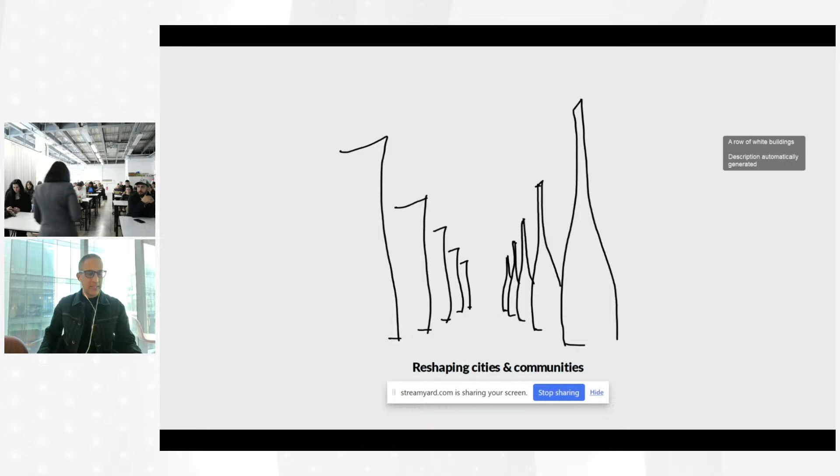Thank you, Suat, for the invite, and thanks everyone for joining today. I'll try to keep - I don't like to call it a presentation, I like to call it a chit chat. So I'll just take you through a bit of my architectural journey, the projects we are working on, and engage you through the progress or career of somebody who studied architecture and had a dream to achieve something in architecture. Whether this dream has been fulfilled or not is something different. But I will take you quickly through my journey, my education, my career, and then the projects we've been working on. Feel free to ask questions, to stop if you have anything to raise or comment on. So let's make it a flexible chit chat more than a presentation itself.

Each journey, each architectural career starts with a journey. And this is something I always say: it's important for architectural students to set up an objective when they enter this field. When they decide to start architecture, it's one of the very few professions that you cannot just do because you just want to be an architect. It's something you have to do because you have to study something. It's one of these professions where you really need to have a deep understanding and passion towards, because it's quite a demanding profession. It's very fulfilling mentally, spiritually, but also very demanding.

Since I was a kid, I knew that architecture was going to be my path. Maybe because I grew up in an architectural house - my father was an architect, he is an architect still. So growing up as a kid, I saw physical models, drawings. At that time, there were T-squares and drawing tables. I grew up within this kind of environment. So shaping architecture as my career was a bit of a clear idea for me.

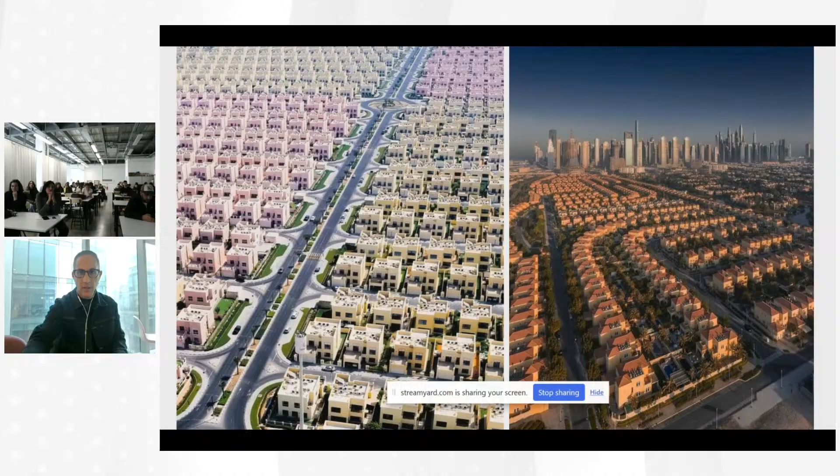Our first project that we had to build in Dubai was a townhouses project. The client came to us with a brief: they wanted to build 28 townhouses in Dubai. Repeated copy-paste, commercials are very important, budget was tight. So our challenge was how to design a residential project that hits all the client's objectives in terms of budget and cost, but at the same time stands out.

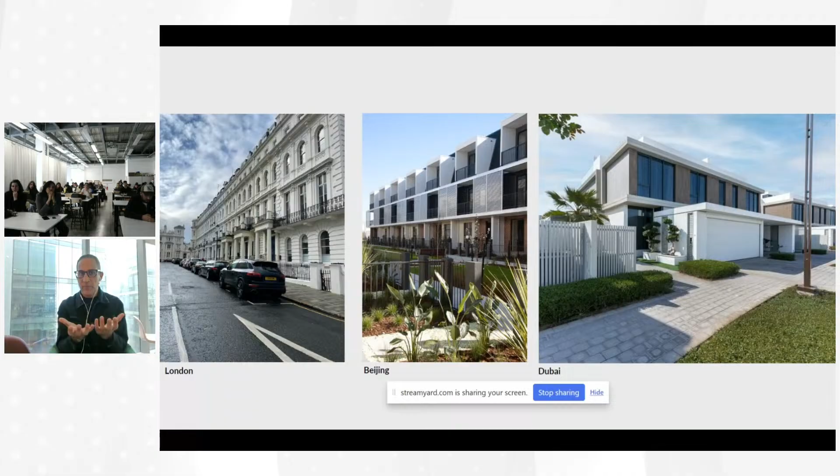And again, the concept of research — we did research about villas and townhouses projects in Dubai, townhouses projects in Beijing, townhouses projects in London, to see how we can come up with solutions and ideas that make this project stand out and add a signature to the city.

So again, we kept looking at all the typologies in Dubai. All of them had no identity, no spirit, no character. Our main vision was that we have to create something that stands out.

So as you start in the studio now in this university, we start with a brief, with a land. The client gave us a piece of land and told us these are the boundaries. As per regulations, we can build X square meters on this plot, we can go X meters in terms of number of floors and the height of the building. They said, please design for us 28 townhouses that are commercially viable, but at the same time produce a significant look and feel.

So this is a quick comparison between what Dubai is used to on the left side and what we provided the client with.

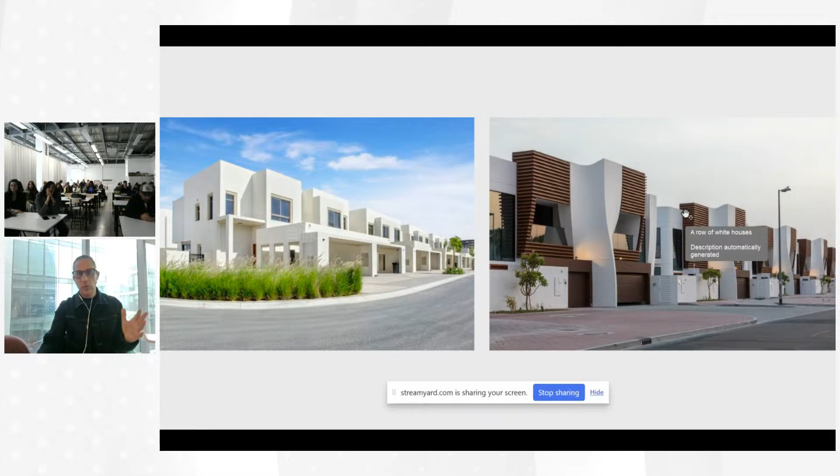So inspiration is very important. And whatever you've learned at university about concept, what is your concept of the design, that thing should not fade out when you're actually in your professional career. A successful architectural studio or a successful architect should always look for inspiration. Even if you're doing a commercial project for a developer, we start with this first concept: what is our inspiration, what are we trying to deliver here?

And one of the first things we've noticed on the site, if we go back to the site, is that it's a pretty empty site. There's no soul, there's no character, no landscape, nothing at all. So we felt that we need to bring a bit of fluidity to the site, a bit of spirit to the site.

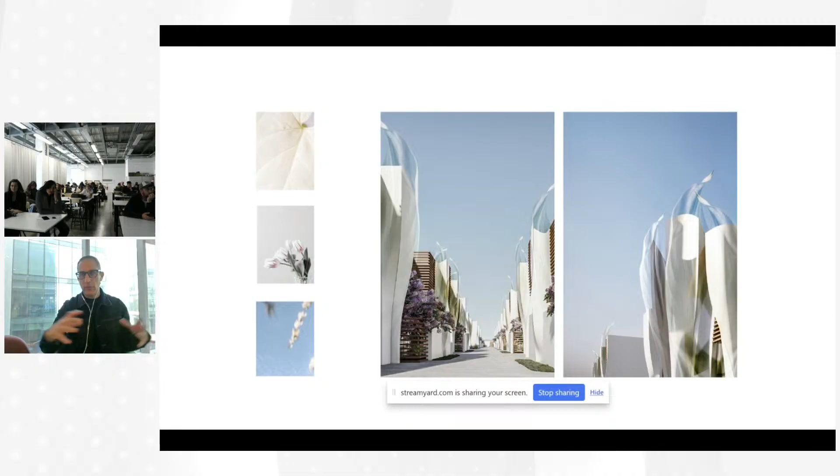Our concept was, why don't we get inspired by nature? We have this 200 meter plot, why don't we plant it with tulips? And our buildings are going to look like a field of tulips sitting in the middle of the city.

So we started by designing 28 townhouses. They're repeated copy-paste townhouses in terms of plan layout, functionality, and accessibility. It's practical, it's sufficient, it's affordable. It follows all the construction sequence and construction capabilities in the city, but at the same time, how can we look into a facade feature, a design feature that makes the project stand out from everything else?

So we came up with this concept of planting the site with a tulip feature that works as a structural connection between the two townhouses. And the 28 townhouses overlook a central spine that serves the community.

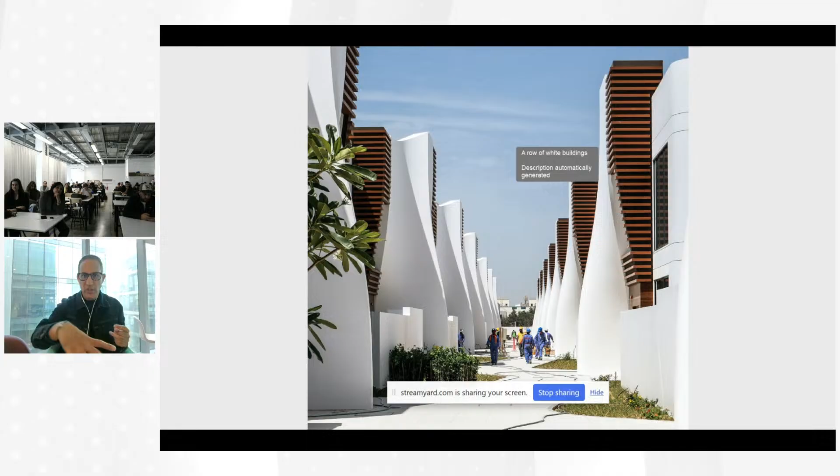Again, we didn't want to design a project where you just get inside your villa, close your door, and completely disconnect from your neighbors and community. Instead we created a central spine, a central breathing space in the heart of the project that acts as a shaded space.

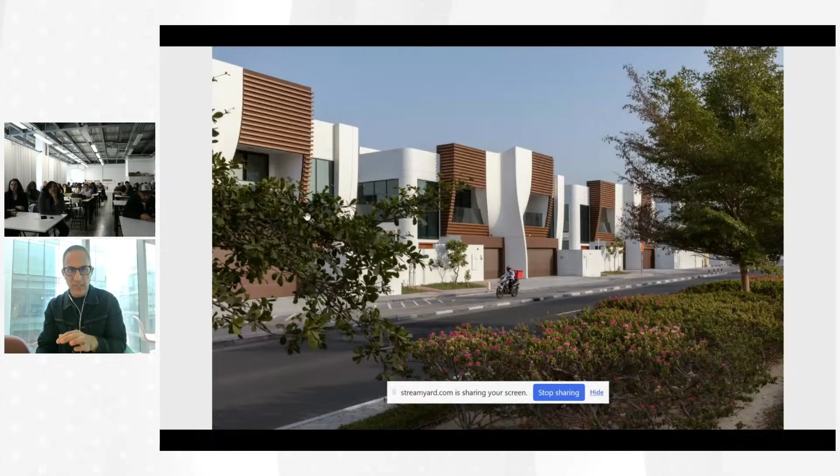It creates a buffer zone from the main busy road. So the internal space here is the one in the center, behind the villas facing the main road. It's two rows of villas with a central spine that acts like the heart of the project, with these distinguished tulip features structurally connecting every two townhouses together.

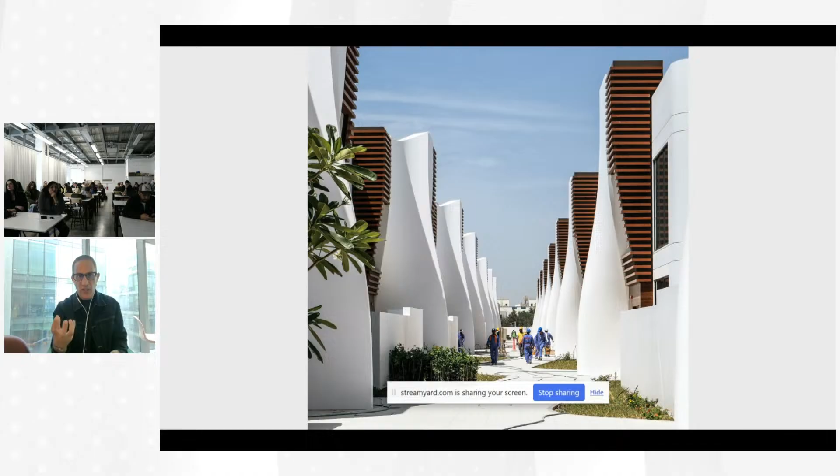Again, showing the construction versus reality.

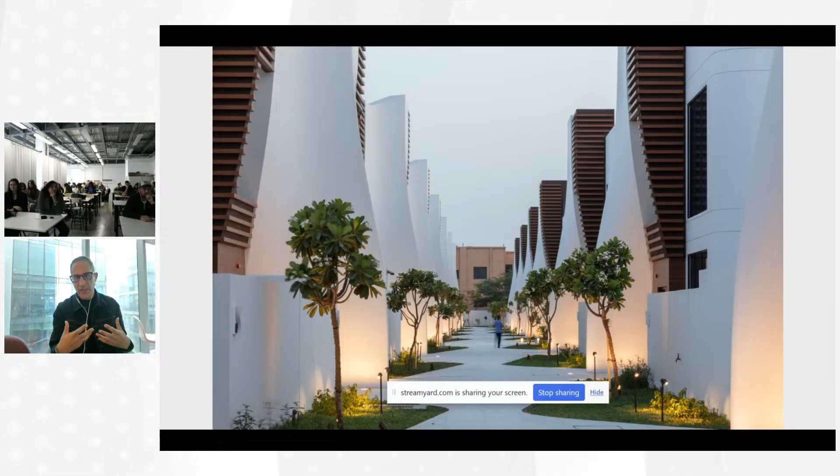At the end of the day, we are providing the client with a profound architectural feature. It creates a communal space in the middle that neighbors can gather in, and this became a very communal space. All the neighbors living in these townhouses, during the evening, go out, do their jogging, go out with their kids on strollers. So it became not only serving the client, but it also acted as a social connection between the neighbors and the tenants.

Again, just different views showing the articulation of the project and how these features act not only as a structural connection between the townhouses, but start to draw a nice silhouette that breaks the rigidness of the street and the entire neighborhood.

Because we have the repeated townhouses, adding these tulip features, these white features, it breaks the rigidness of the street. So we have 28 townhouses overlooking a central spine that became the breathing space for the tenants and residents.

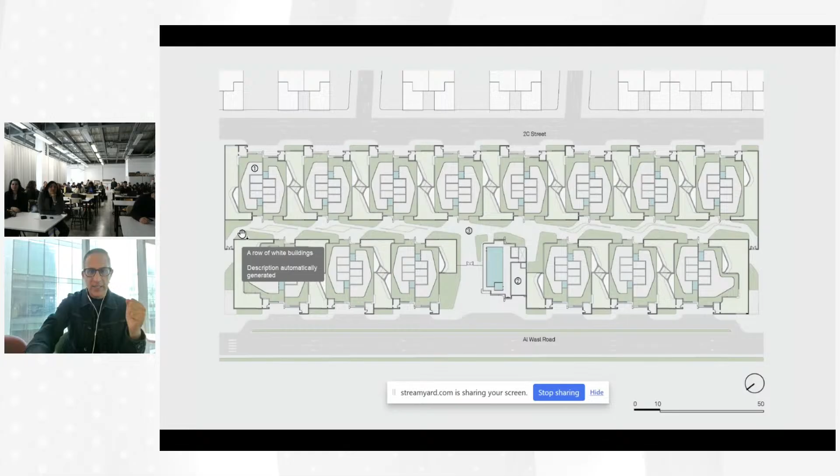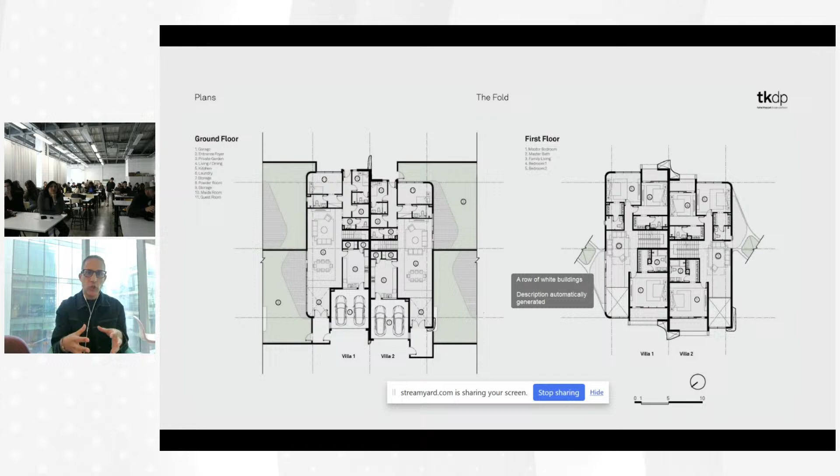Each townhouse, again, if you do a quite iconic, organic, external form, it doesn't mean that you need to compromise your internal spaces. So from an internal planning layout, it was very efficient.

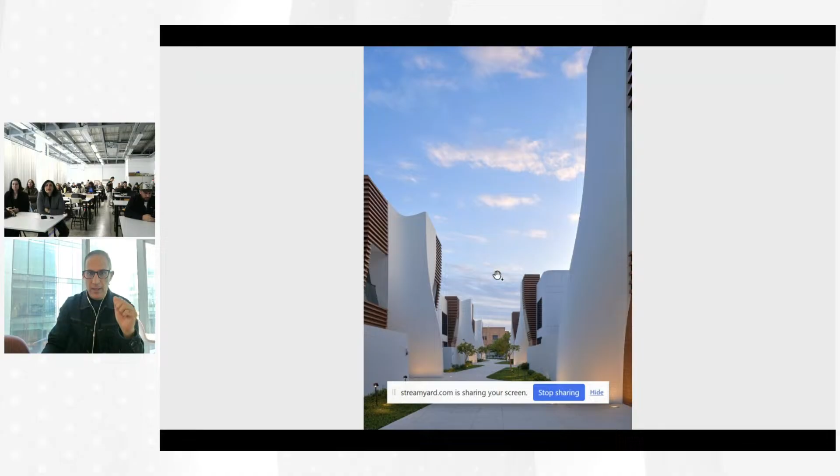These are the two townhouses connected with the tulip feature that connects them structurally together. And again, just different views through the spine, showing the detailing.

It's very, very important to be honest to what we model. So everything we do out of 3D. And this is maybe an important message for you, whichever year you are, second year, third year, graduation.

Investing in your digital skills is the only thing I can recommend. The only recommendation I can give you is investing in your digital skills. And I'm not talking about SketchUp or ArchiCAD. I'm talking about Rhino, 3ds Max, Maya, Grasshopper. You should have this kind of weapon.

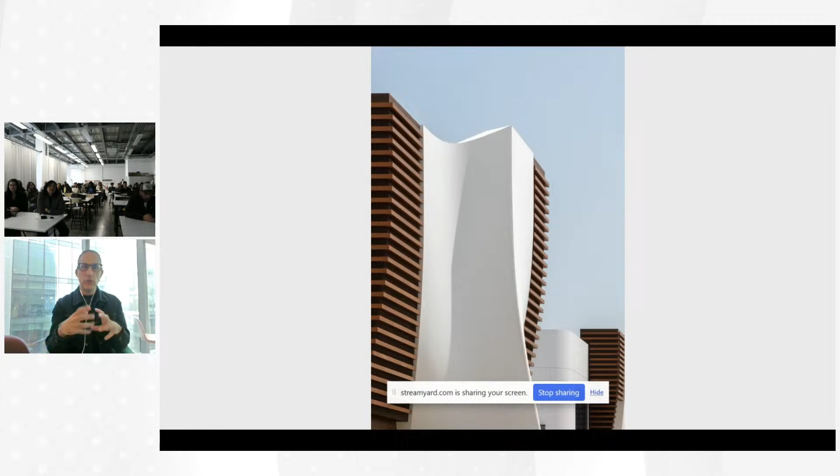You should be strengthening your skills by having the best digital skills that allow you to transfer and translate your dreams onto paper. All these interfaces between different materials, all these things and details, we've been articulating in the 3D world.

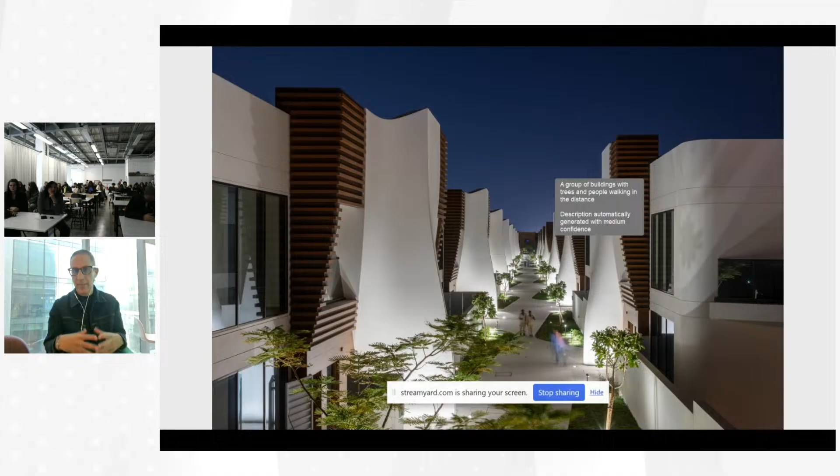The project was completed. It's fully sold, so the clients commercially achieved their targets. And architecturally, we created a masterpiece that won so many international awards, and it's been published globally.

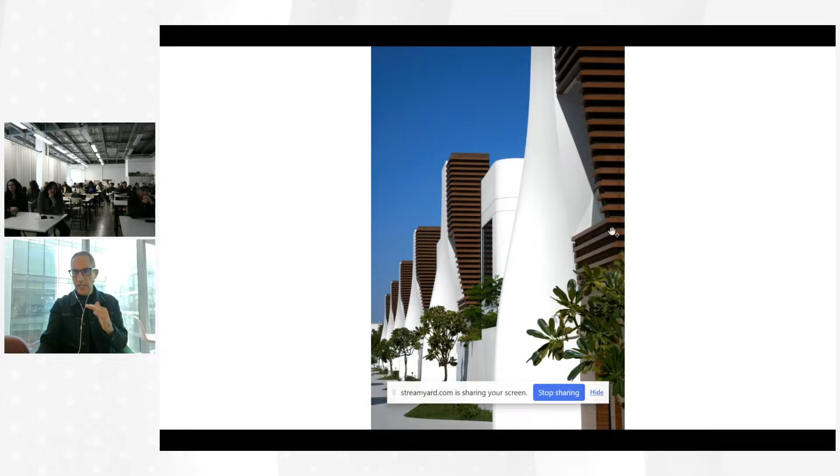Just different finishes for the project, simple and clean. There's no need to go for many colors, just two different tones to create a nice synergy and harmony within the surroundings, to create contrast between the sky, the white finishes, and the wood-like material. All these things add a nice balance and harmony to the project.

This is something I'm always proud to show clients, which is the journey of our work, from the competition, from the concept render we did when we started the project, the dreamy sketch, the vision we sold to the client, to the execution during construction, to the reality. And if you visit the project in real life, you'll find the reality has a better quality, look and feel than the actual render. So this shows the pre, during, and after completion.

That massive tulip feature that connects the two townhouses together creates a distinguished entrance point and makes this project a landmark within the city.

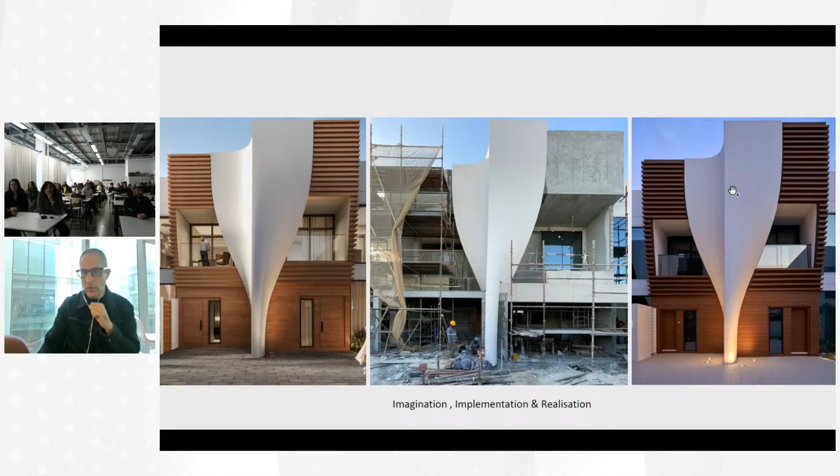Just different corners, different shades, and different details showing the relationship between different materials and surfaces. Each townhouse had a jacuzzi and a small pool on the top, providing a breathtaking skyline view towards the city.

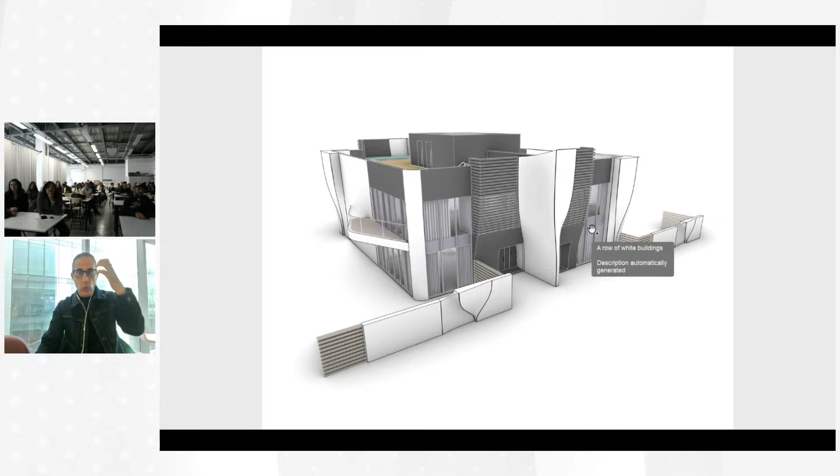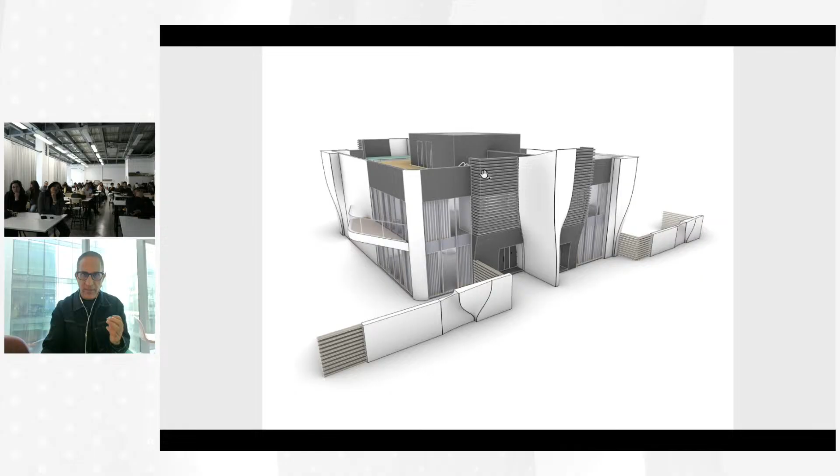Again, everything we do during the entire stages, we develop in 3D. So we produce CAD drawings, sections, elevation plans, but everything, every detail you see, every interface, we solve in the 3D world. We don't rely on just 2D drawings, because if you have a quite complex geometry, regardless how many sections or plans you take, you cannot understand the complexity or the interfaces without understanding this in 3D.

For example, we had to study all the interfaces of the project to understand the detailing of that one.

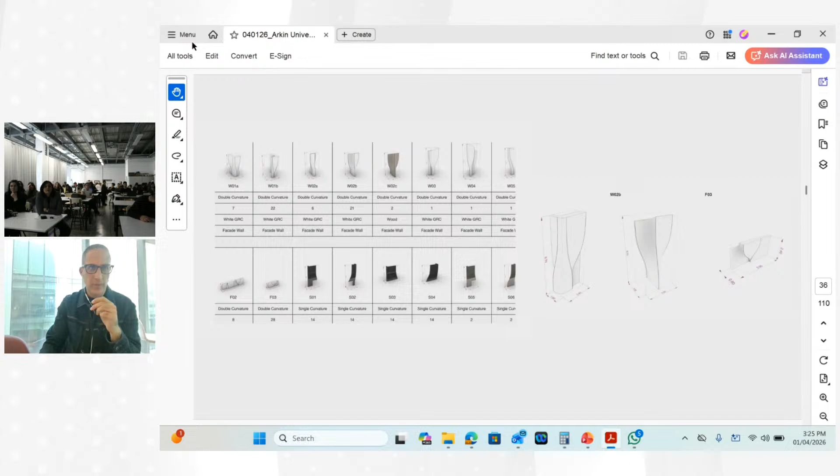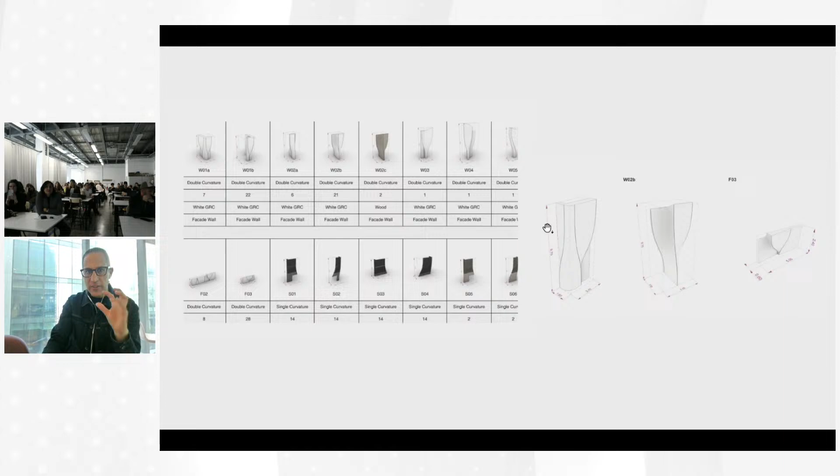So the tulip feature, the white feature, we had to go through so many rationalization processes. We had to create families. This is GRC, glass reinforced concrete, a very fluid material. It's very solid, but easy to shape once you create the mold. This shows how important 3D proficiency is to make lots of rationalizations of this feature, the dimensions, and how you can adjust the surfaces to make sure it could be practical and easily executed.

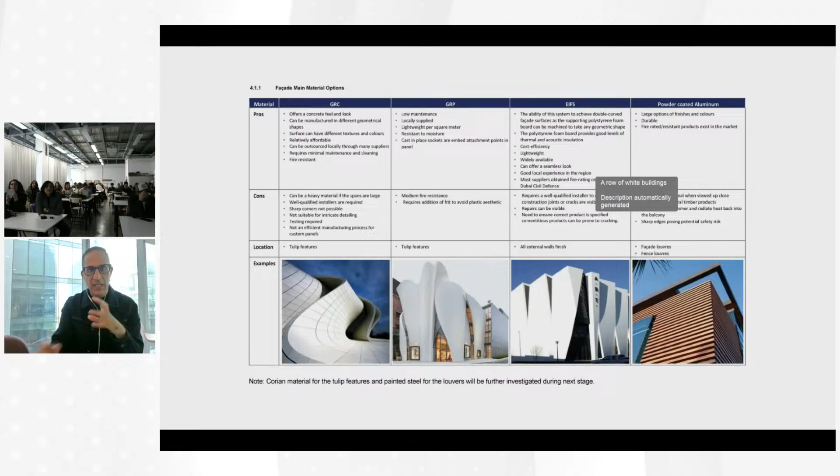And of course, informing the client about the best material. We've done research about which finish we can apply between GRC, GRP, EIFS, powder-coated aluminum. It's very important to understand the material and the advantage of each one, and how this material could serve your architectural design and the environmental aspect of the project.

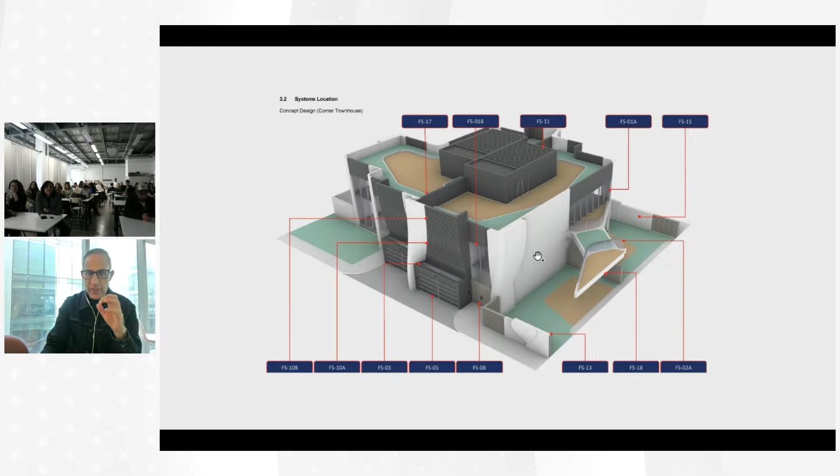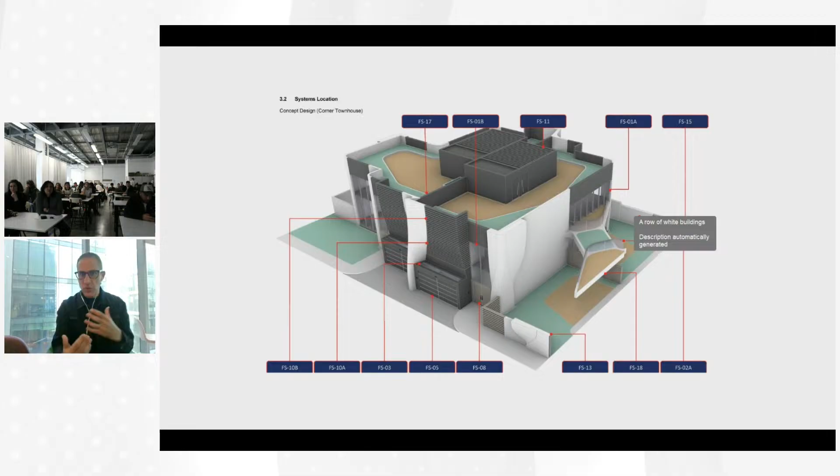Again, dividing the building into categories, into sections, different materials, different interfaces. Basically, it's like a Lego. We have to break down the building into components and sections and reassemble it again to understand the challenges we might be facing and how we can sort out every detail and every aspect of the project.

Going forward, we don't only produce 2D sections, we produce 3D sections to understand the interfaces, the cladding, the wall build-up. These things you cannot achieve if you don't have strong 3D knowledge and skills.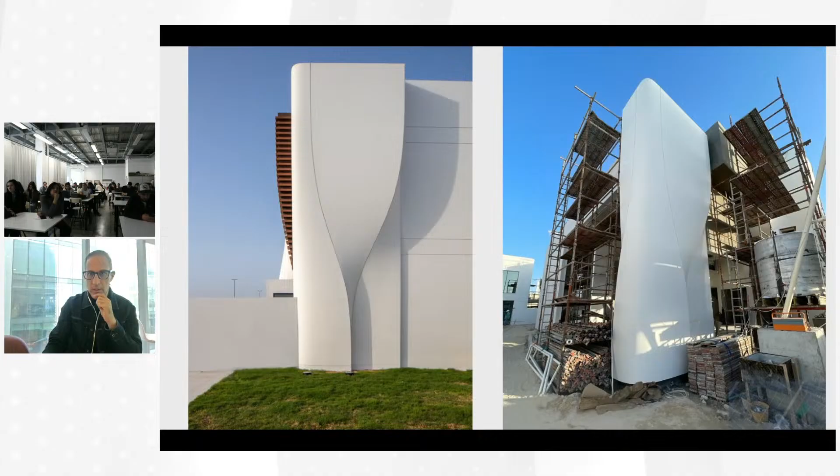This is during construction when we installed the tulip feature connecting the two townhouses. Again, during construction and at completion.

Details are very, very important. You might have the most beautiful render, the most beautiful project from a distance, but once you get closer to the project, you start to find problems, you start to find ugly details. So understanding the interfaces is very important to make sure we have spotless quality.

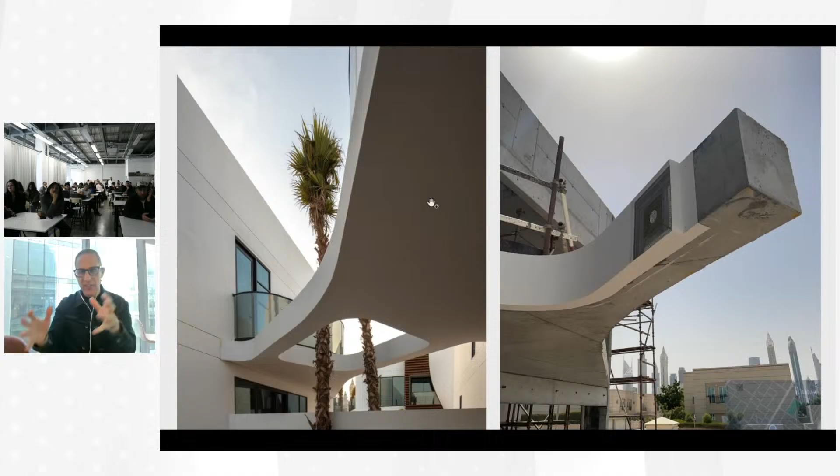Each cluster of two townhouses is connected through bridges with a hole in the middle that allows a landscape feature to go between them.

In general views, the second project I'd like to talk about is the H Residence. It's in Dubai as well, and the client owned this piece of land with an old building on it.

So there was an existing building on the plot, a small shopping mall, ground plus two, with Baskin Robbins, Domino's Pizza, and small cafes. It was the hangout place for kids and teenagers in the area, who used to go there after school to buy their ice cream and pizza.

So it was an ugly building, but it has lots of memories because it was built a long time ago. The client decided to demolish this building and build something new, modern. When the client took that decision, there was lots of noise in the neighborhood, in the community. People were writing on Facebook, on Twitter that they're against demolishing this building. Let's keep it, it's part of our childhood memories.

So as an architect, we felt an obligation that we have to bring something back to the community. We are taking away their memories, but we need to give them something back. The first thing we thought about was that amongst this entire neighborhood, which is very dense with shops, villas, clinics, cafes, there's no park there. There's no green landscape area that could be accessible by everyone.

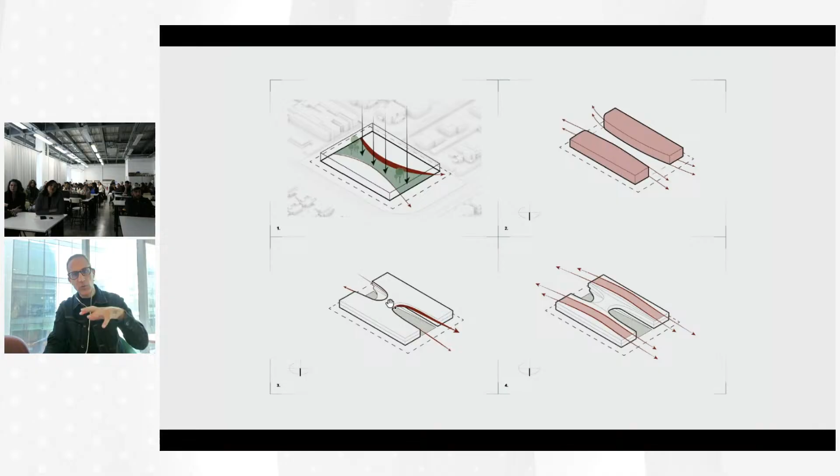So after splitting the building into two sections by creating the central plaza, on the first floor we connected the two sections by a bridge. This bridge doesn't interrupt the flow of movement between the beginning of the site and the end of the site.

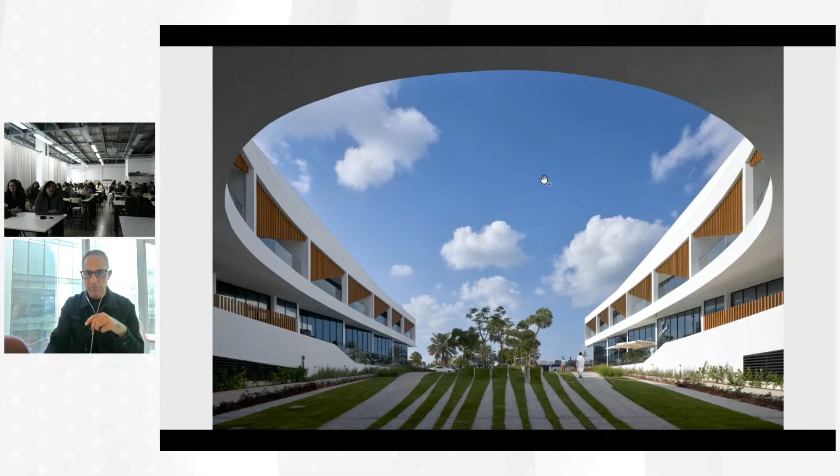So, as I mentioned, this is the real photo - we created the central plaza in the project that splits the building into two sections with a bridge connecting the two sections. By this, all these restaurants on the right and left here have a view towards the park. So commercially, it elevates these restaurants. And the apartments here as well, they have a view towards the park.

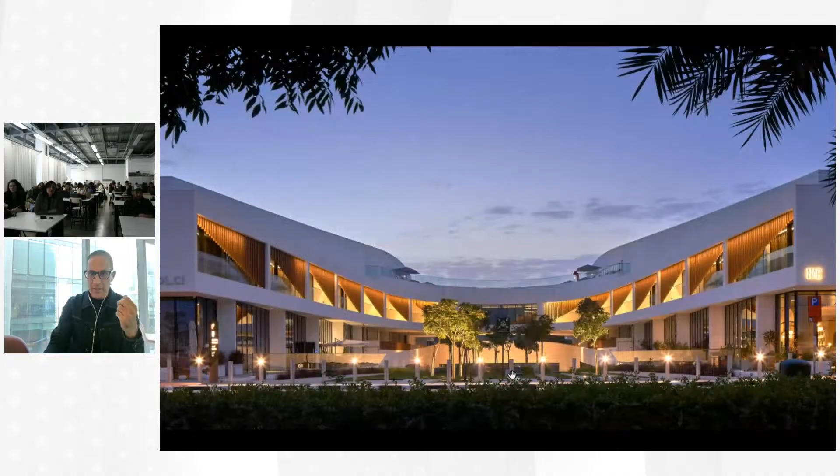So this is a photo taken from the main street. We created a central plaza that splits the building into two sections, and the plaza is gently sloping down to create a sense of nature and fluidity.

And then we have the restaurants on the right and the left, apartments on the first floor, and townhouses at the back side of the project, and the bridge that connects the two sections. This bridge is only accessible by the residents, and this park could be accessible by everyone - by the people in the restaurant, even you as a person living in the neighborhood. You can take your sandwich and sit in this park. So it becomes a true immersive, human-centric space that could be utilized by everyone.

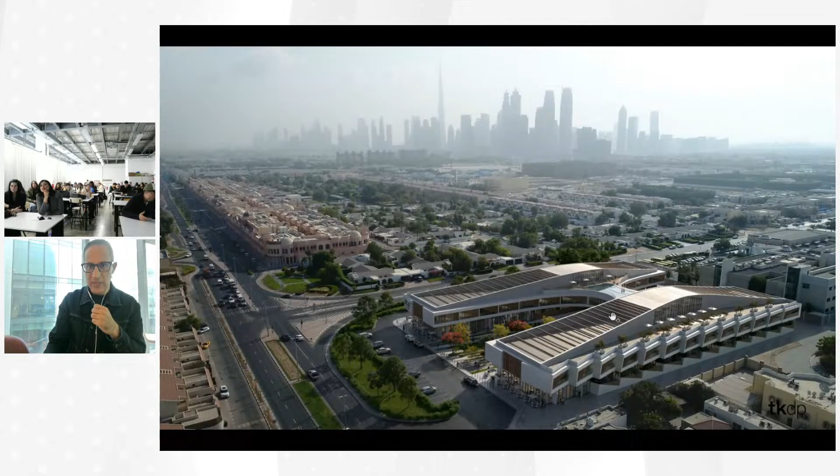Again, this is kind of an aerial shot showing the building with the plaza in the center and the bridge connecting both buildings.

And you see the plaza is sloping down, going all the way down to the back of the project where we have the lobby of the residents. So at the end of the plaza it goes under the bridge, penetrates through the lobby of the residents. To the back side of the project, we have the drop-off area for the residents.

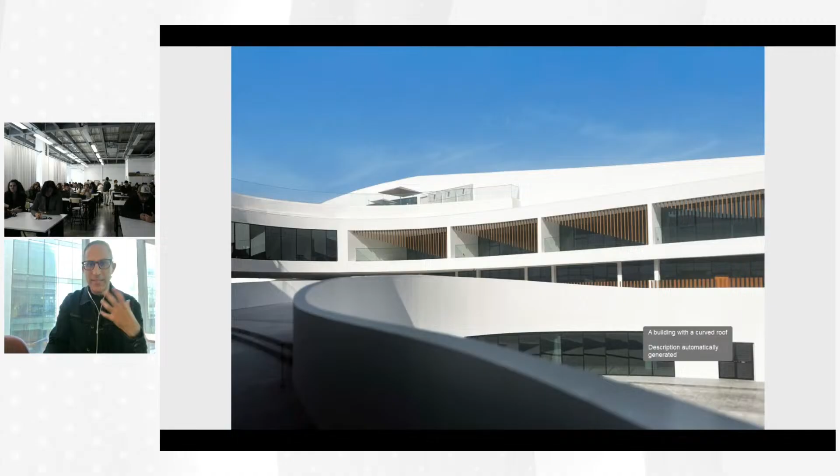And the fluidity of the line - it's a very simple finish, just plaster cladding, concrete with a plaster finish. So again, there's no need to complicate the material, the finishes. If you really control the geometry, you can have a beautiful result and beautiful finishes.

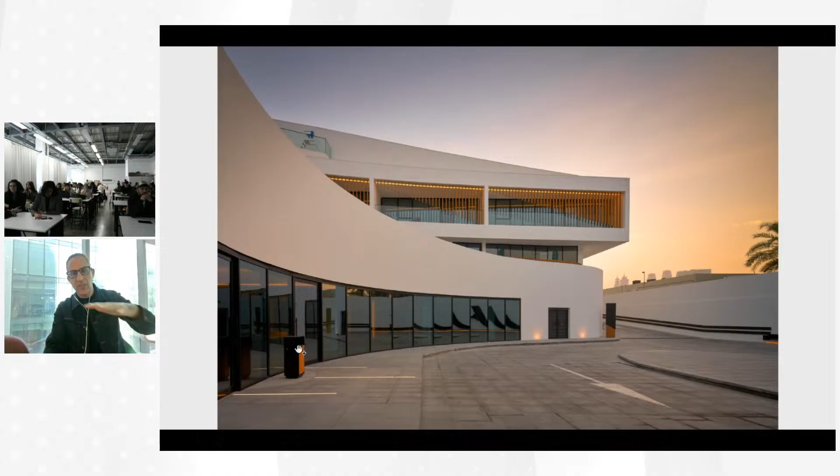So the plaza goes from the main street towards the center of the plaza, under the bridge to the lobby. To the back side of the project, we have the drop-off area for the residents. And again, looking at finishes, making research about the best cladding, the best finishes that the project can achieve.

All the details are built in 3D. So even when we do zoom-in details, 1 to 10, 1 to 5, we do them in 3D to understand the brackets, the connectivity, the build-up of the walls.

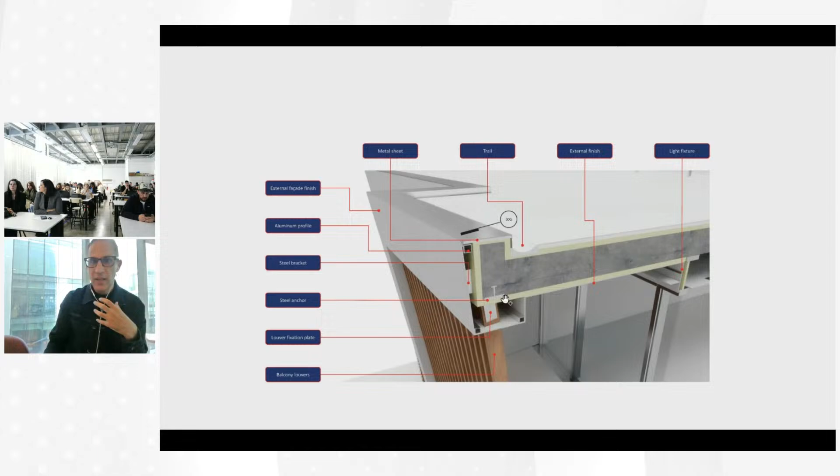So again, I keep emphasizing in every talk I give at any university, I keep encouraging students to invest in their digital skills.

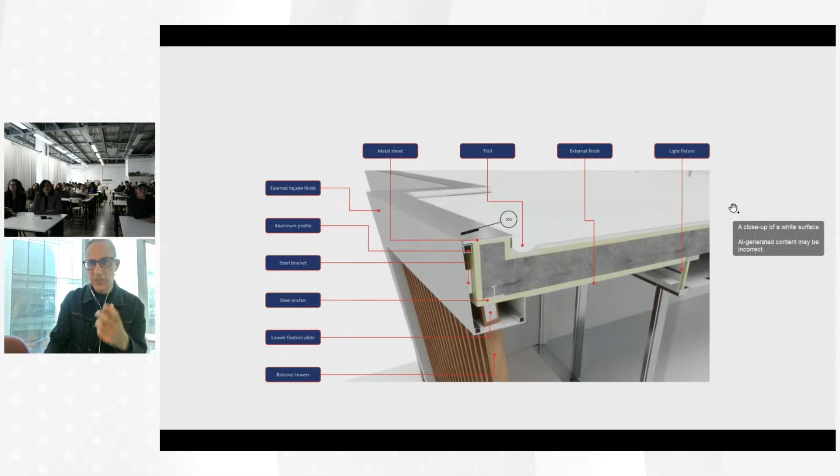During the construction, doing mock-ups to understand the finishes, the quality, supervising the contractor's work.

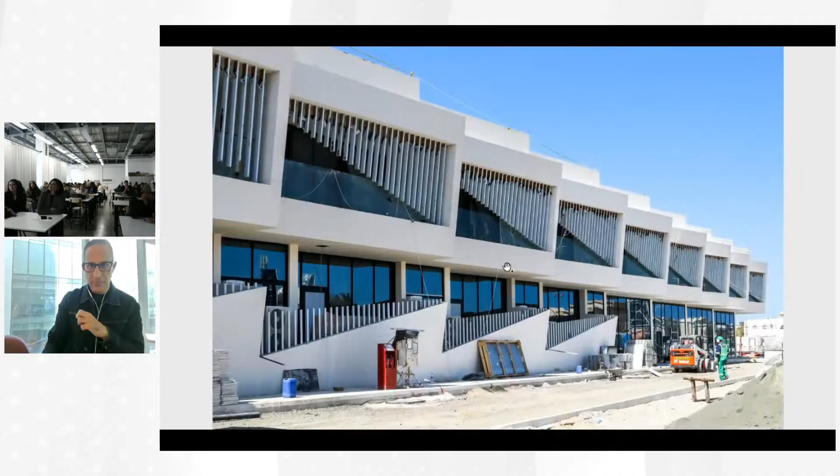On the side of the project, we designed the balconies so they are semi-shaded by these louvers, creating a semi-shaded space while also giving a sense of privacy to the people inside these apartments. During construction and after completion, the right choice of light, finishes, everything gives you the proper kind of look and feel.

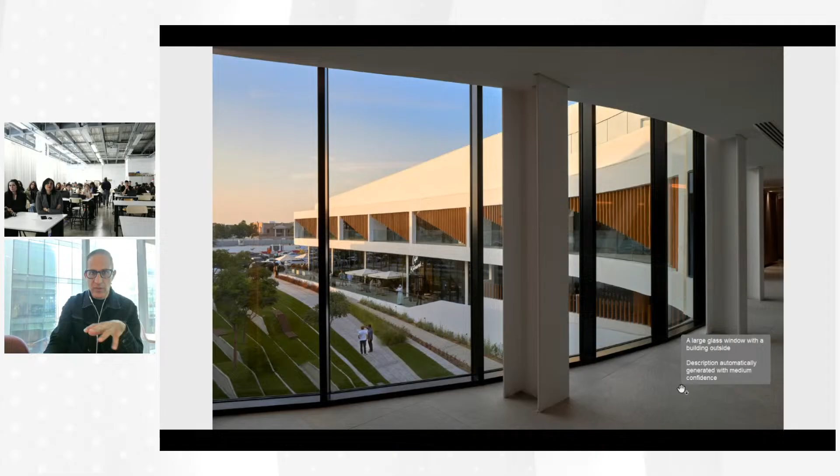This is a view from the back of the project where we have the drop-off area of the residents. And this is a view from the lobby, from the bridge that connects the two sections of the building. It's only accessible by the tenants, and it's kind of a lounge, giving a view towards the plaza of the project. Small details, the finishes, the color selection, all complement the architecture.

This is during construction, showing the plaza that goes under the bridge. The bridge at the top hosts a swimming pool, only for the tenants, that gives them a view towards the downtown skyline, Burj Khalifa, and towards the plaza.

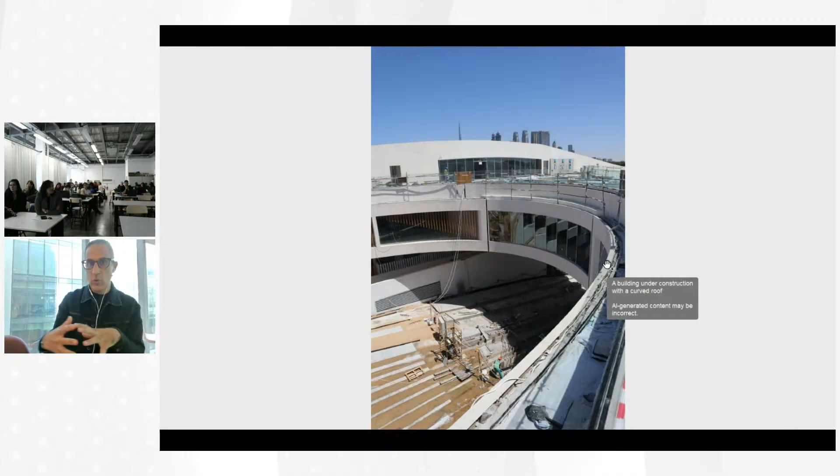Different views from the bridge. Clean, neat finishes - we intentionally wanted to create contrast, so the exterior looks quite fluid and complex, but the interior looks very simple. We made this decision because the bridge connecting the two sections spans 26 meters, quite a huge span, so it has a steel structure. The decision was to expose the steel structure and keep it as part of the interior space.

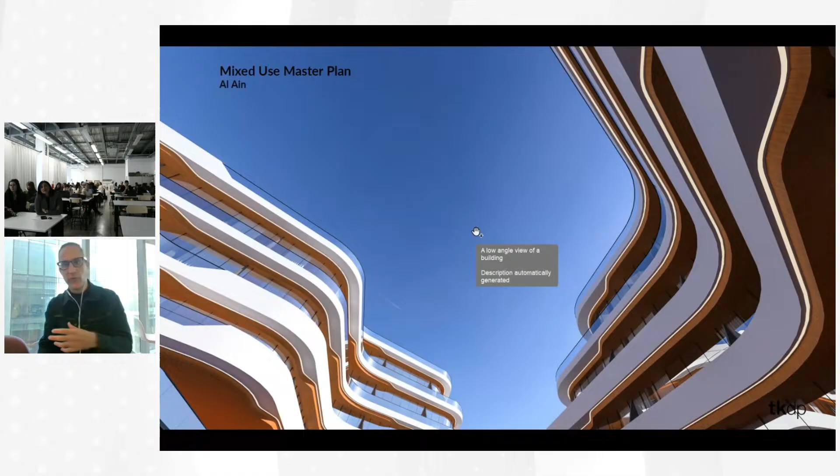I'm just quickly going through some of our projects which are under design stages. This is a mixed-use project in the UAE - commercial, retail, apartments, and villas. The whole concept of how we create all our design is the subject of this presentation.

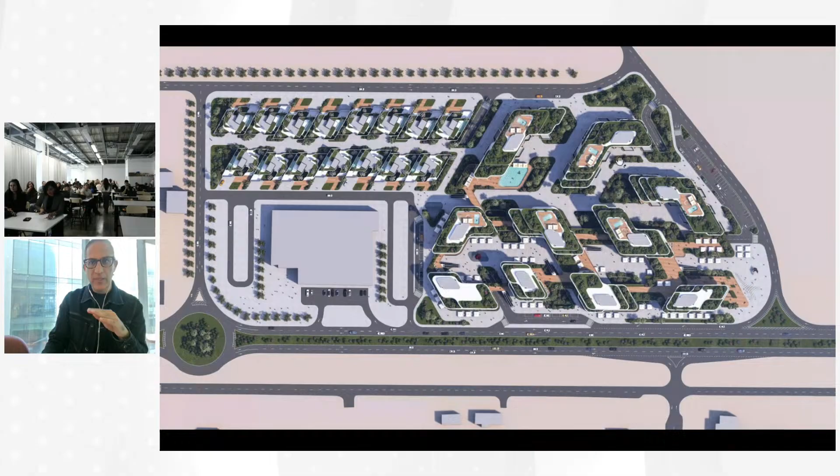About shaping cities and communities, we strongly believe that design should play an important part in shaping communities and how we bring people together, how we create spaces where people can interact. This project was based on creating a series of layers of bridges and public spaces that connect all the buildings together on a ground floor level and on the podium level, creating nice terraces and elevated spaces that make it a truly human-centric space.

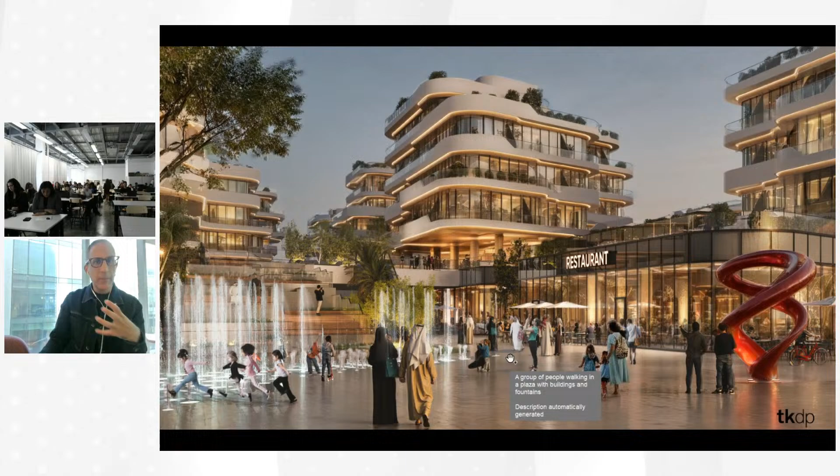This is a view from one of the plazas overlooking the restaurant and outdoor sitting area. These are the apartments with a view towards the plaza. Again, it's about bringing people together while respecting privacy.

As we connect all the buildings on the ground floor with shaded corridors, when the weather is very hot, we also connected the buildings through the podium level, through outdoor terraces, so people can navigate from one building to another.

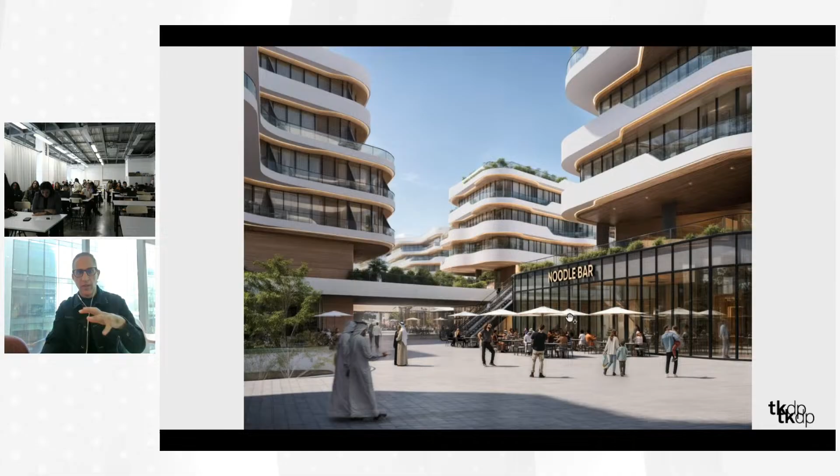Different views showing this concept of plazas and mini courtyards interlocking and intersecting, and how we address the commercial buildings - offices with a cafe on the ground floor. We pushed the cafe so only 50% of it is indoor space, and elevated the first floor of the offices on columns, creating an outdoor sitting area for the cafe.

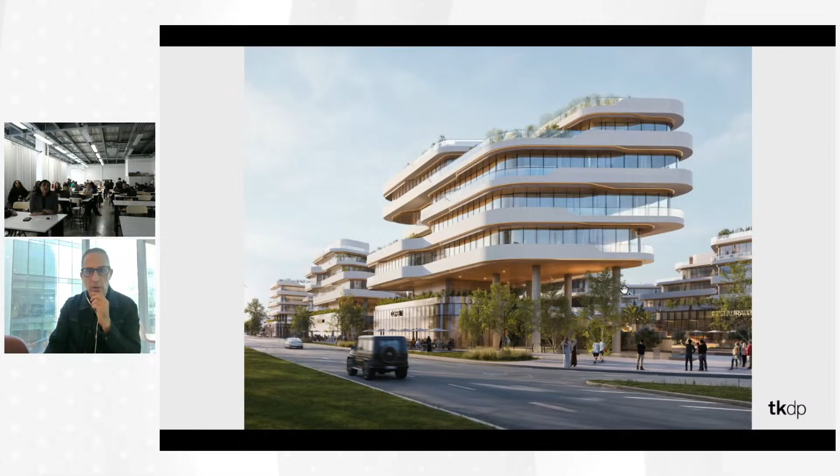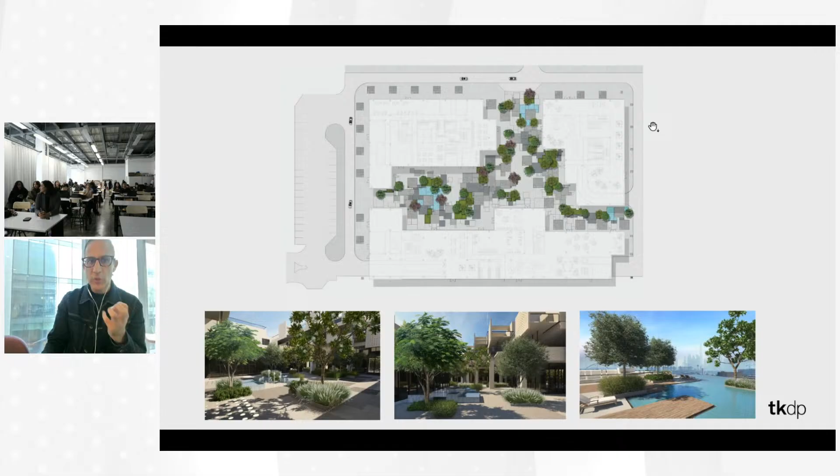Another project we are working on - we don't only do fluid, organic architecture with curves. Sometimes the design itself requires a different approach. This is a mixed-use project in Dubai as well, with offices, retail, and apartments. The whole concept is about creating pixelated clusters overlapping each other, which start creating the form and start to create voids and spaces for shaded areas, outdoor sitting areas, and courtyards.

All our design philosophy is about creating outdoor spaces that allow the public and users to interact together, and how we can utilize the roof by creating outdoor sitting areas. We always believe the roof is our fifth elevation, our fifth facade. We have four facades in any project, but the roof should always be treated as the fifth elevation, making sure it's accessible and has architectural features.

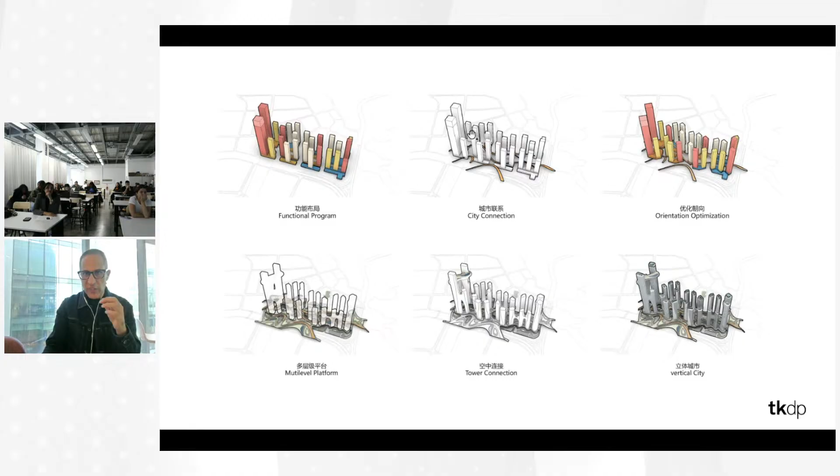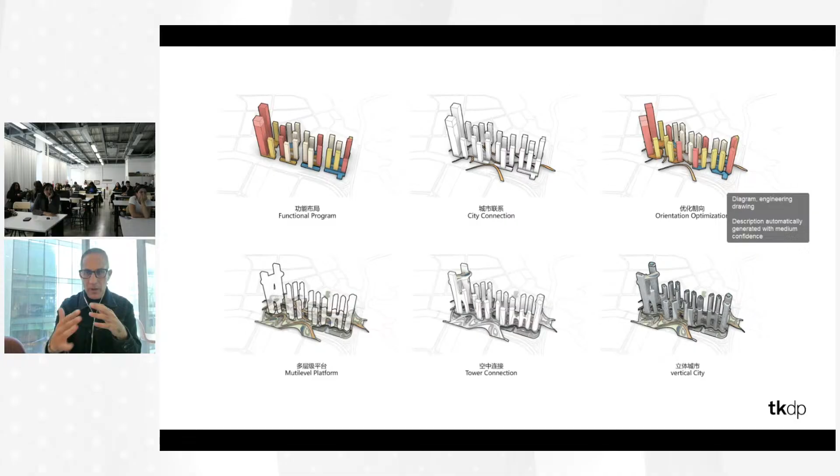Then we started understanding how we can connect this new city with the surrounding cities. We then started slightly adjusting the position of each tower, the rotation, to maximize the view corridors, the wind direction, the sun path, etc., making sure each tower is positioned in its optimum way environmentally.

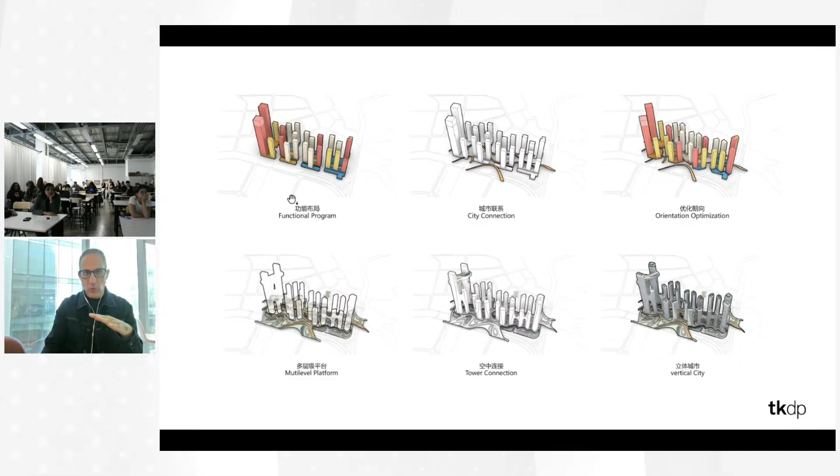Then we created 3 layers of what we call a horizontal city. We have the vertical city, which is the towers, and the 3 layers of horizontal city in the form of bridges, podiums, platforms, and public spaces that allow people to navigate on a human scale level, on the podium level, while the vertical city sits on top.

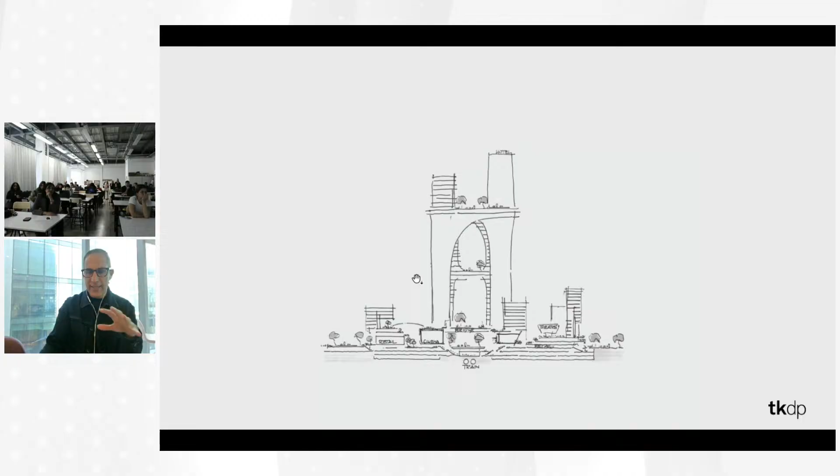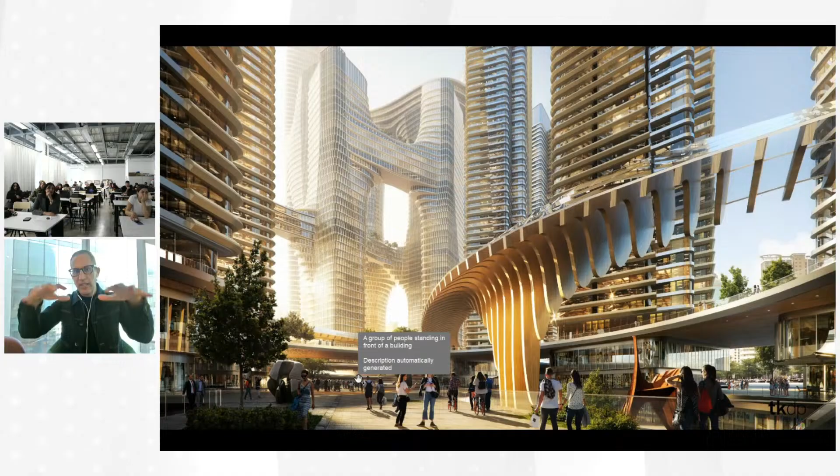So it doesn't create a sense of dominant features. It creates a sense of a human scale approach. So it's a human scale city within this giant city on top of it.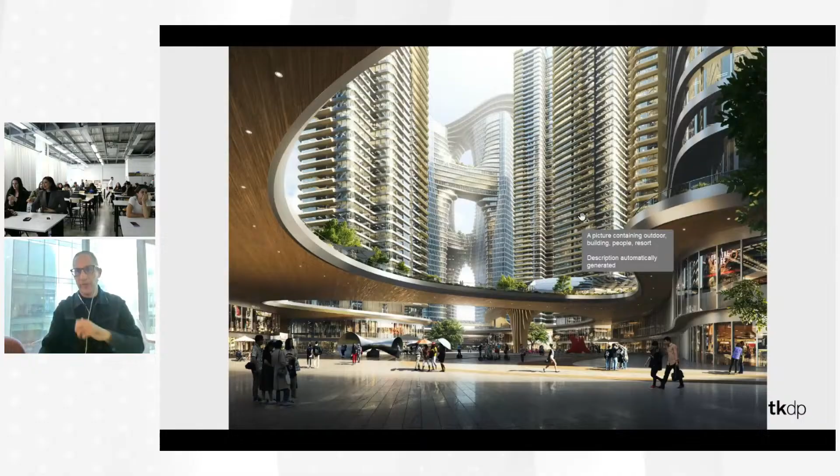I'm just quickly going through some of the projects we're doing. This is another project we're doing in Dubai. It's a mini master plan where the client wanted to build a small office building for social media companies like TikTok, Facebook, Twitter, etc.

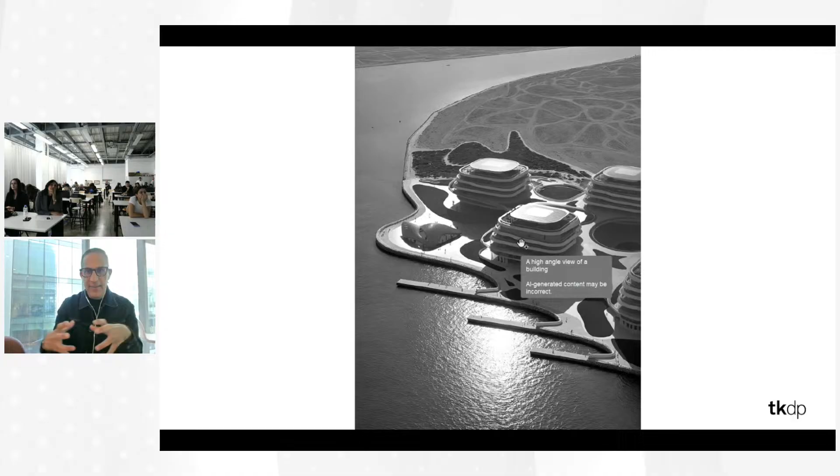Our idea was again to create a cluster and a building for each social media representative, but still they are not acting and performing in isolation — they're also connected on the ground floor level and on the podium level, to make sure that social media is about connectivity.

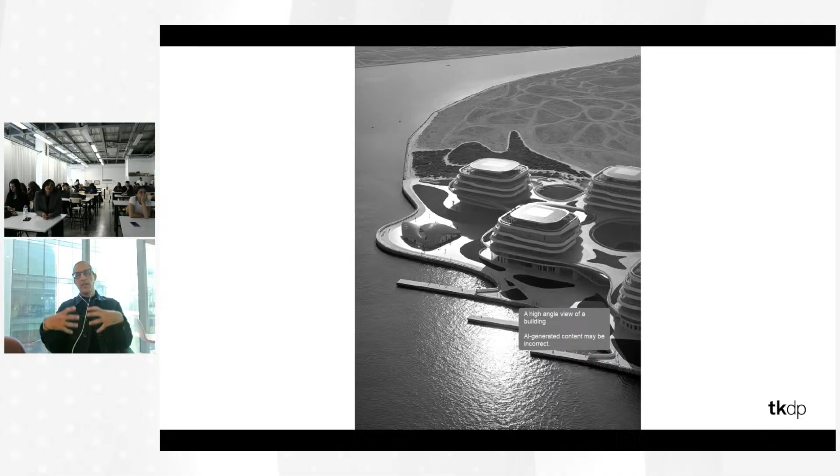Yes, every company has its own headquarters, its own policy, its own mission, its own vision, but at the same time their mission is to connect people, and that's what the building should also be doing — connecting buildings from different levels through bridges, and bringing people closer.

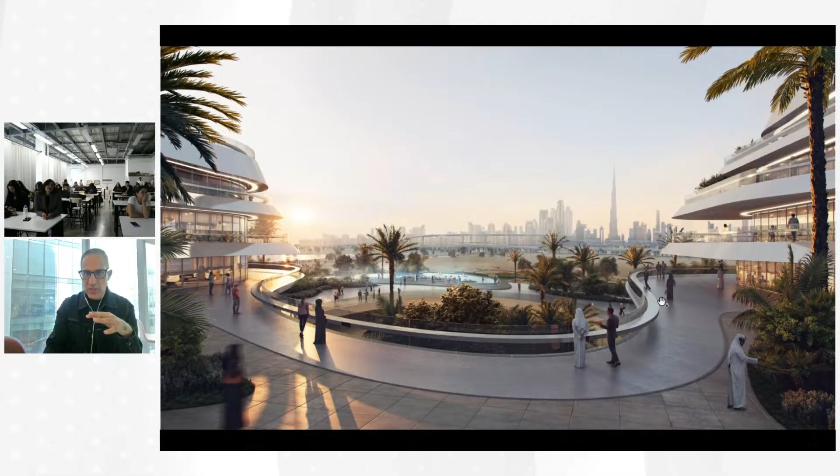The concept of building these layers of bridges also enhances visual connectivity, so you always feel you are part of the building wherever you go.

This is a master plan we are doing currently in Sharjah in the UAE. It's 520 units between townhouses and villas. Again, we did the master plan of how we create a human urban space that allows people to have outdoor parks, public spaces, and a seamless relationship between the different clusters within the master plan.

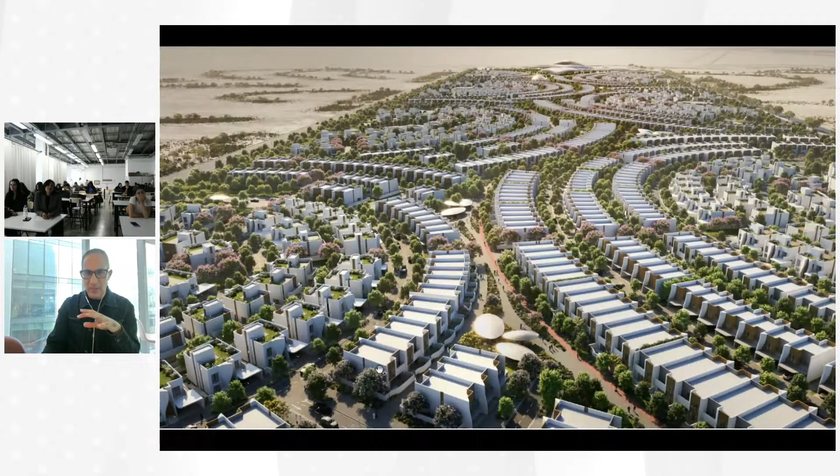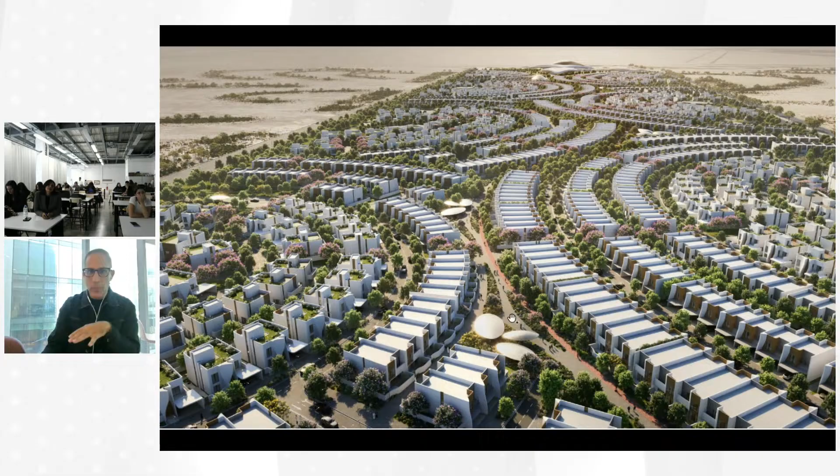The master plan is divided into phases — we have 1, 2, 3, 4, 5, 6, 7 phases. So we created this kind of elliptical intersection between each phase of the master plan that breaks the boundaries between the phases, so you have complete synergy and a seamless connection between each townhouse.

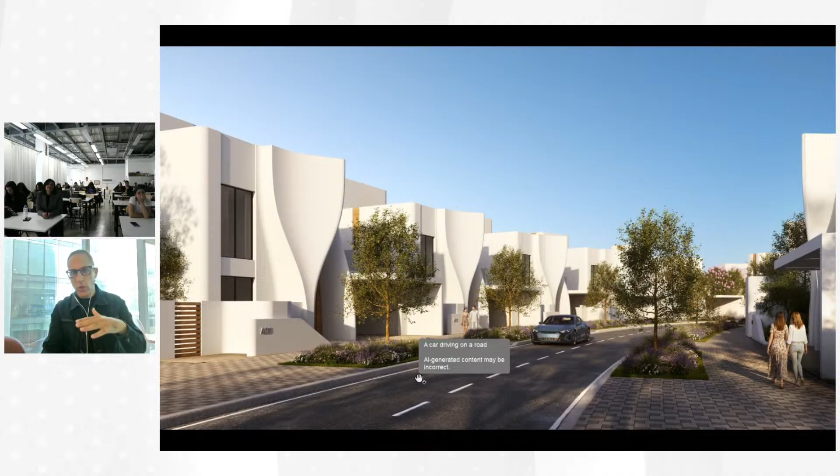Then how to bring the design of the villas by creating a significant feature that creates a clear entry point to each villa, and how you can read this at eye street level. So when you do a master plan, you don't just look from the aerial view, but also study the eye level view, which is the most important — that's what people will see on a daily basis.

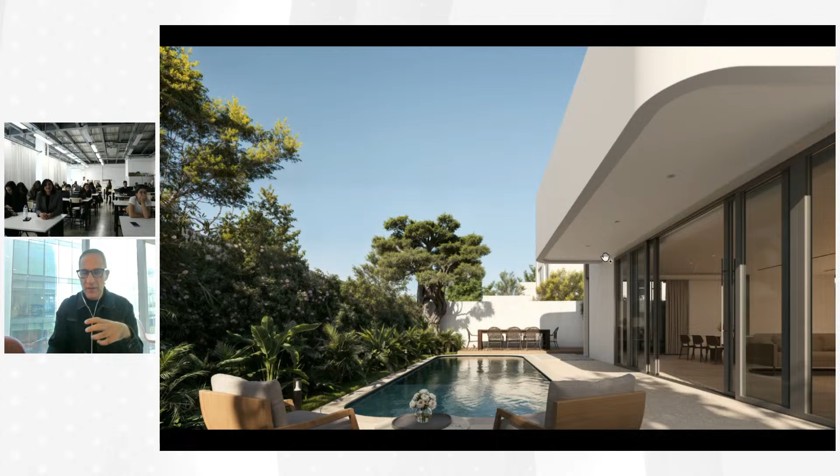Again, creating these small sikkas, the small walkways between the townhouses, trying to create intimate spaces. It's very important to understand human behavior in terms of distance, the most convenient distance between the houses to create comfort for tenants and people walking in. That walkway doesn't only create a space for jogging and walking during the day or evening, but also creates a visual and private separation between the townhouses. Each townhouse becomes its own small oasis with a small swimming pool and landscape that gives you enclosure and separates you from your neighbors and the surrounding area.

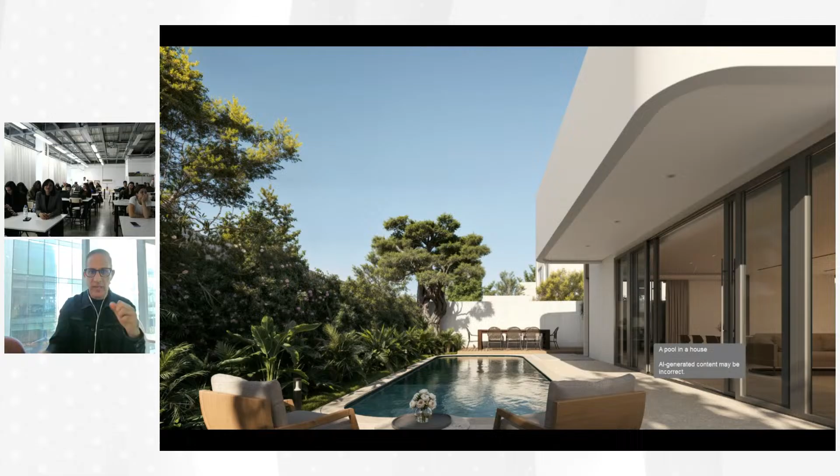I will end with this last project we are working on in Dubai. We work on most typologies - residential projects, master plans, hospitality and commercial. I couldn't include all the projects because of time and confidentiality, but this is one of the latest we're working on. It's a G+30, a 30-floor tower. The main challenge was that the client was very obsessed about maximizing the efficiency of the tower, not creating big balconies. They wanted to utilize every square meter of the building, and our challenge was how to create an interesting extrusion.

When you design a tower, you design the footprint and then extrude. You have the central core where you have your lifts and staircase in the center. But the tower is a very dominant feature - if you're talking about G+30 or G+40 floors, it's a very significant structure in the middle of the city. So how do you create a seamless vertical transition within the city? Our main approach was to work on a maximized, efficient floor plan and start slightly articulating the balcony positions and depths, trying to create gaps between the towers.

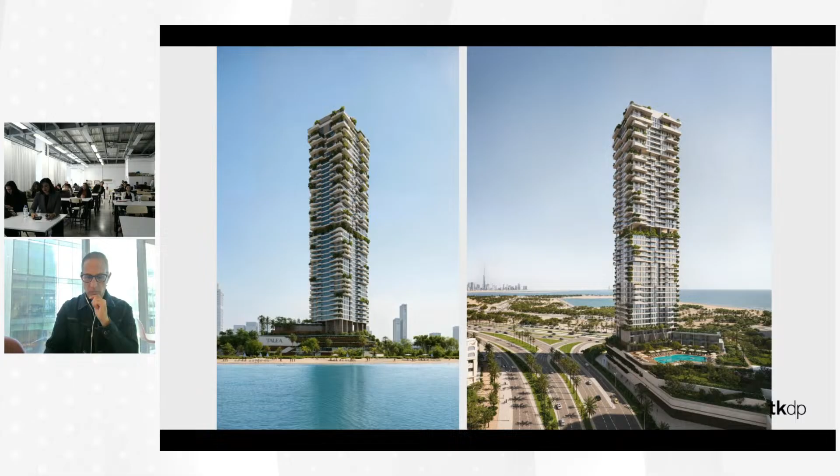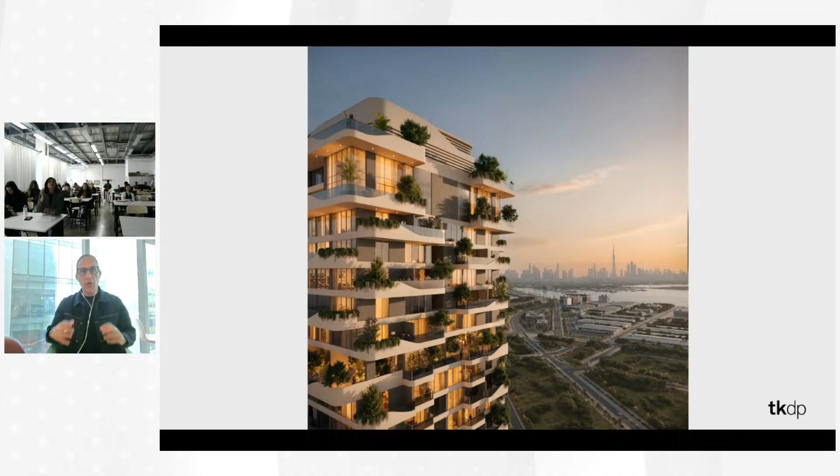This is a view of the upper floors, with the penthouses, townhouses, terraces, and the way each one shifts. None of these movements is random - we do intensive research and studies on how to position each balcony, whether it serves the bedrooms, dining rooms, or living room, how it relates to the level below, and how much the balcony could cantilever for structural purposes. Going back to the concept of 3D, you cannot sort out these things by plans and sections alone. You can only do it with strong 3D capabilities and skills that let you understand the design and the form-finding process, and how 3D tools help translate your ideas and vision.

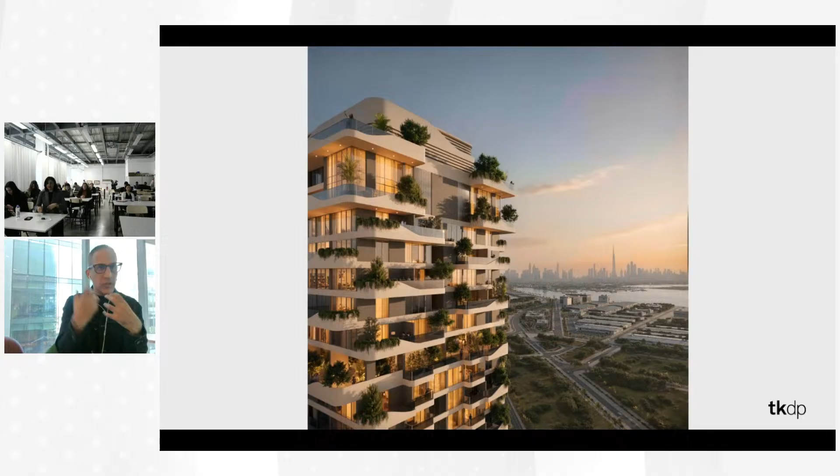And that's it. I wanted to be short, I didn't want to take much of your time or go on forever. So that's the conclusion of the presentation. I hope it was helpful and that I wasn't too fast.

Thank you very much. Thank you. It was amazing, and thank you for sharing all this experience and work with us. It means a lot for us and our students, and hopefully they learn a lot. Thank you. Pleasure.